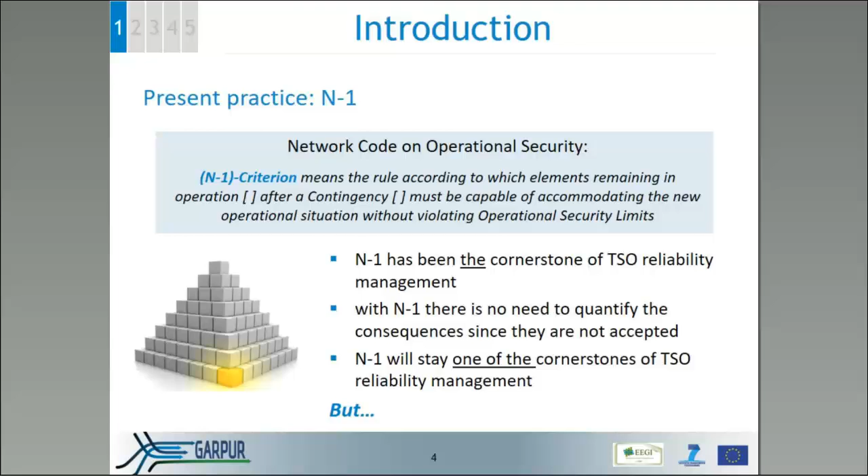A major shortcoming is that N-1 will treat all outages as equally probable. Also, it does not distinguish in any way between different consequences of outages. It is not sufficient to deal with uncertainties in large, complex systems. And what about the increasing probability of multiple outages?

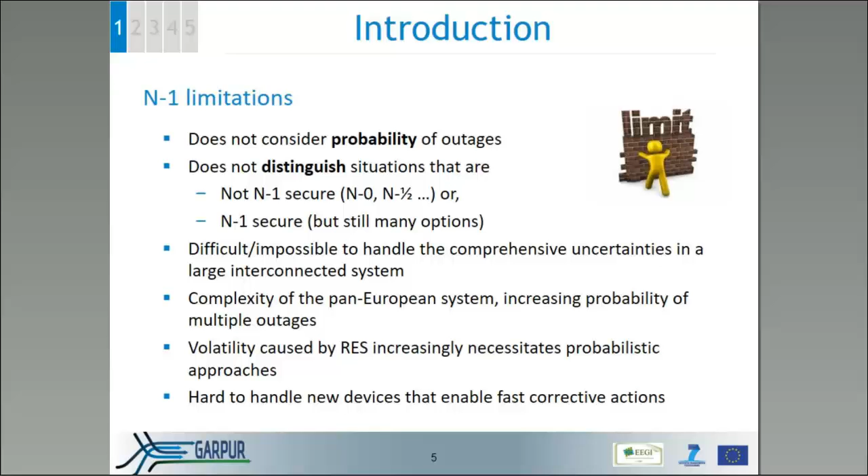Altogether, we see that there is a clear need for a probabilistic approach, which also will need to take corrective actions into account.

GARPUR responds to this by making a framework to balance reliability and costs. The question is, how can we reduce socioeconomic costs and still maintain reliability of supply?

For this, GARPUR has designed, developed, and assessed new probabilistic reliability criteria and evaluated their practical use with focus on social welfare effects. And for this, the different TSO time horizons are covered: power system operation, asset management, and also system development.

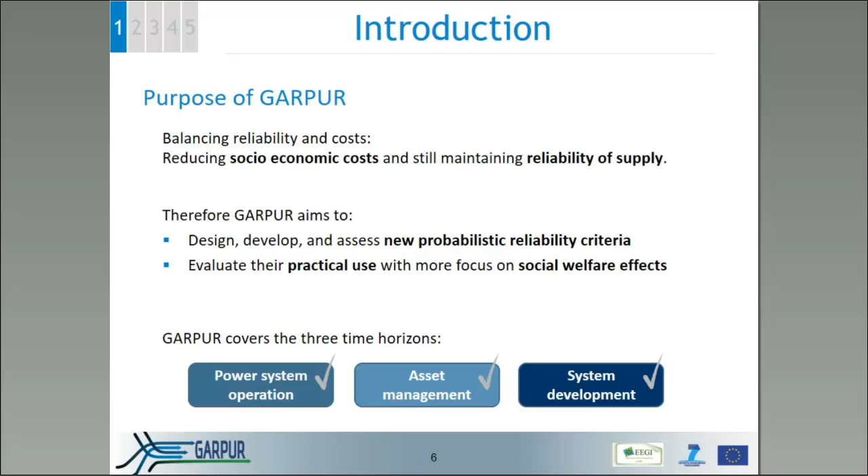Also, a quantification platform is developed for testing the new criteria towards N-1, and a roadmap for the deployment of the new criteria is being developed. And also, of course, dissemination towards stakeholders of the electricity market is important, just like here today.

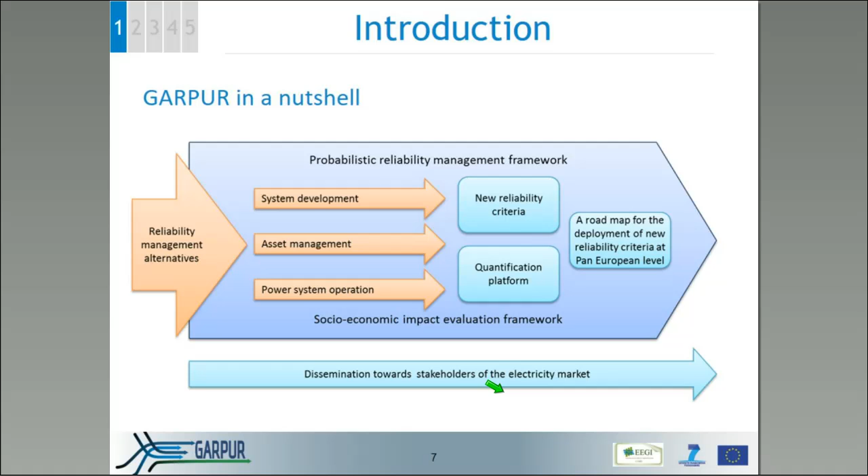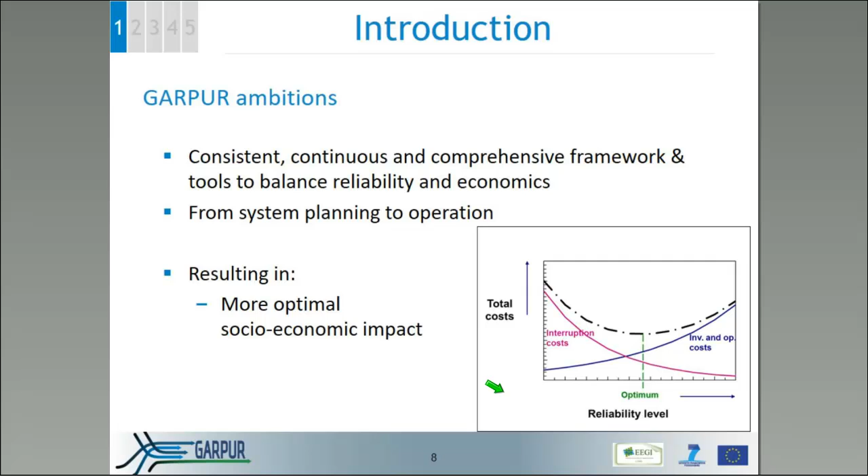So, to sum up, GARPUR is creating a consistent, continuous and comprehensive framework and tools to balance reliability and economics. All time horizons are covered, resulting in a more optimal socio-economic impact or balance between reliability and costs.

So if you need more information about the project, I suggest that you visit our website, garpurproject.eu, where you can also find information about our final conference, which will take place in October in Brussels.

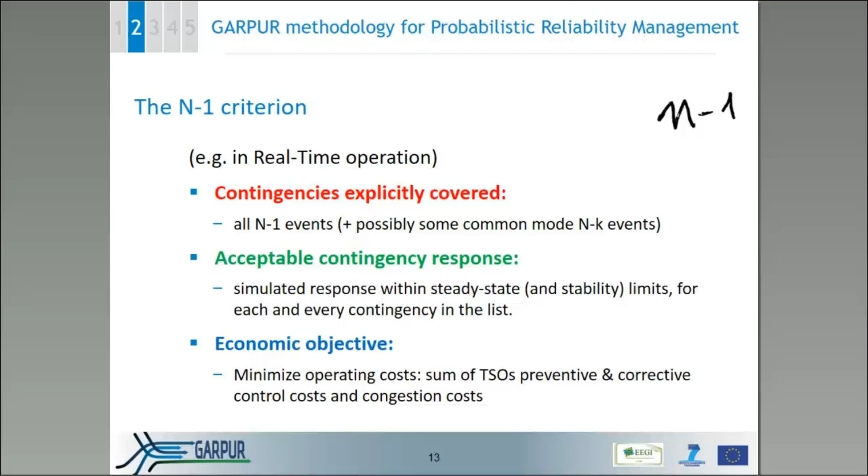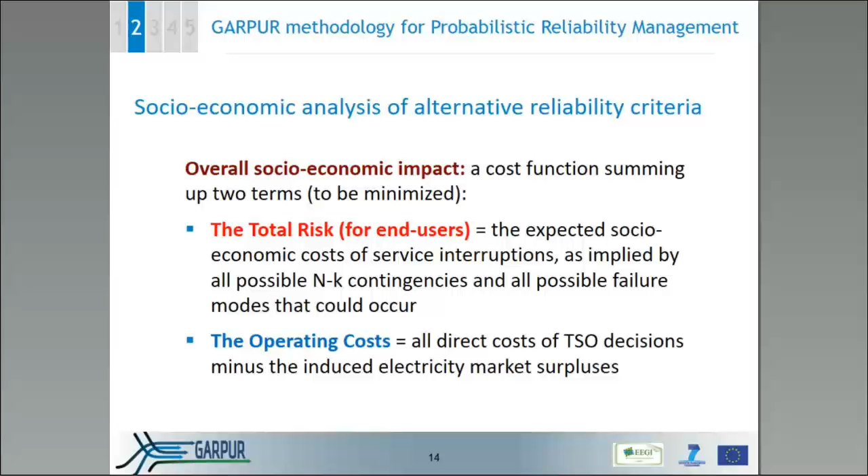Let's look at this criterion using an overall socioeconomic impact measure, which is a cost function summing up two terms: the total risk for end users, which is the expected socioeconomic cost of service interruptions implied by all possible contingencies and failure modes that can happen in practice - not only those covered by the N-1 criterion, but in principle all kinds of events - and on the other hand, the operating costs, which are all the direct costs of the TSO minus the induced market surpluses.

Suppose the TSO applies the N-1 criterion - this will lead to a certain operating cost, and there will be a residual risk because some contingencies which are not N-1 may still happen, have a certain probability, and could lead to load shedding or other consequences monetized in this risk, which is the expectation of these values. If you apply the N-0 criterion, operating costs will be much lower, but the residual risk will be higher.

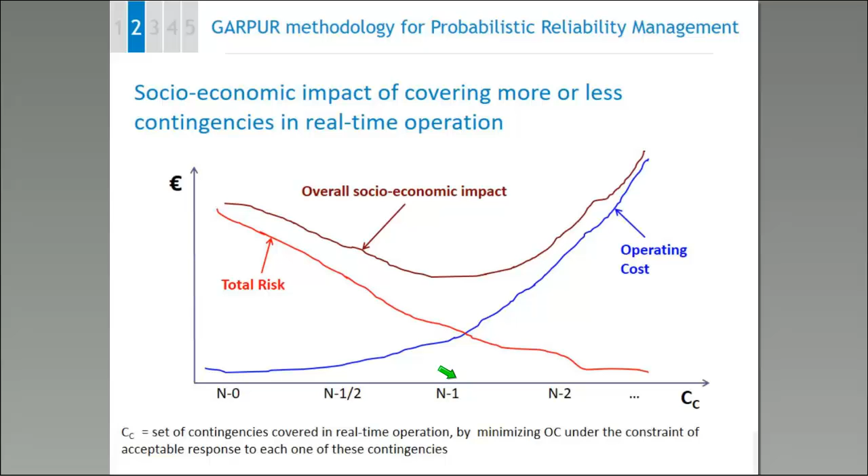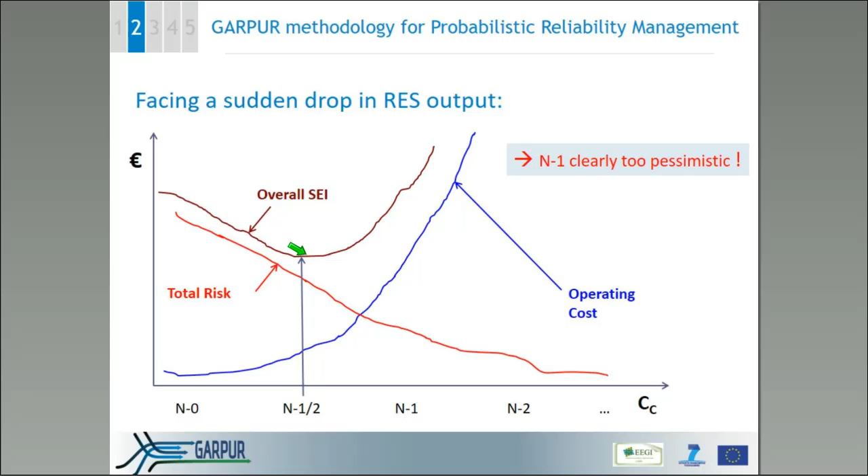If we are in another situation, for instance where there is a lot of available wind power and maybe suddenly there is a drop, then maintaining the N-1 criterion may lead to a very strong increase in operating costs. So the optimum would shift to the left of the curve, meaning it would be more wise to not cover all the N-1 contingencies.

Similarly, if weather conditions are harsh, the probabilities of some N-2 events will increase, so the total risk of service interruptions will increase, and in this case the optimum of the overall socioeconomic impact will shift to the right, meaning it would be wiser, closer to optimum, to cover more than just N-1 contingencies.

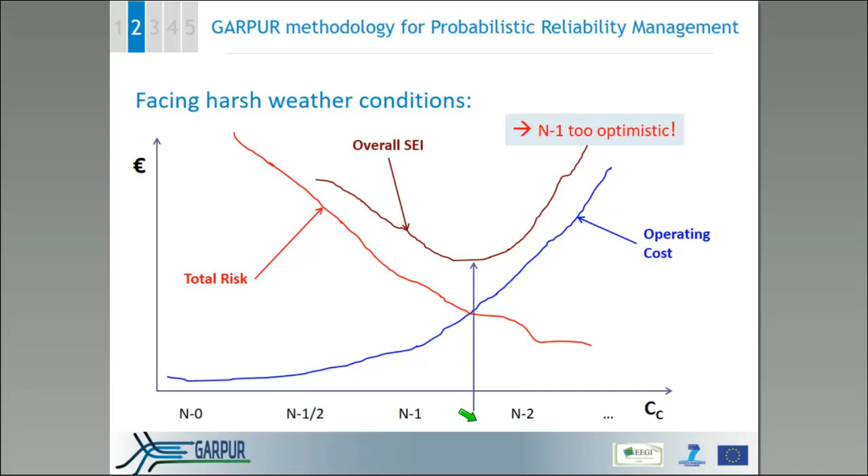So the general situation is that most often the N-1 criterion does not lead to an optimum situation from the overall socioeconomic impact perspective. Therefore we need an approach which allows us to adapt the set of contingencies to available information about all these curves.

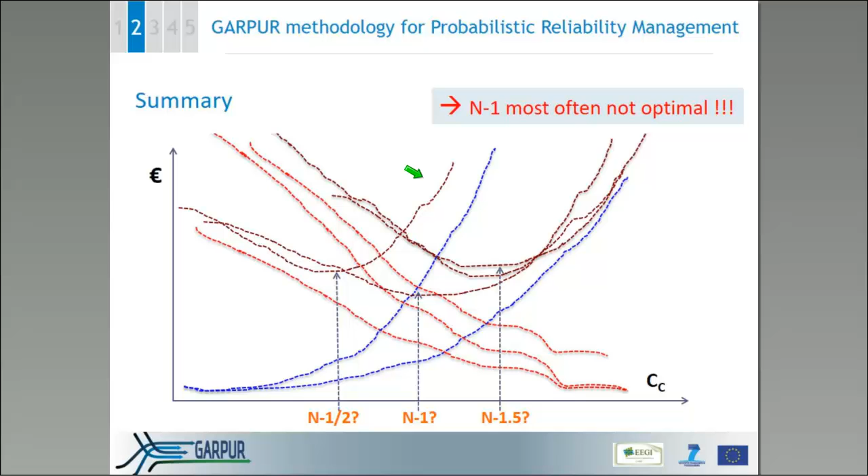This leads to the overall idea of the GARPUR proposal. In order to decide which subset of contingencies should be covered, we propose to dynamically adapt to information about socioeconomic costs of service interruptions, corrective control failure modes, and probabilities of contingencies and of these failure modes.

For instance, if we are in a situation with an important event like a G7 meeting, the cost of service interruptions might increase because we really don't want an interruption at that moment. Or if weather conditions become harsher, then the risk of having multiple contingencies or single contingencies - these probabilities will increase or decrease depending on weather conditions - and the same for the possibility of corrective control failures.

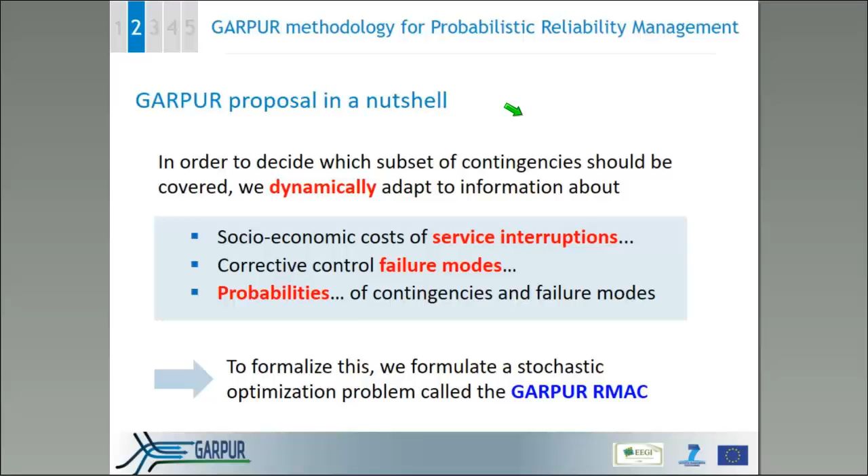So the general idea is to take into account all information available in a certain context to adjust, in a dynamic fashion, the list of contingencies to be covered. This leads to a formal mathematical statement of a stochastic optimization problem that we call the GARPUR RMAC. There are four ingredients in this RMAC.

First of all, the reliability target. This is a set of technical and possibly economic conditions that we want to impose on the possible system responses due to uncertain factors like contingencies, variations in load, and so on. So we formally define what we call an acceptable system trajectory, and then we set a threshold on the probability of unacceptable trajectories - we want this probability to be below a certain confidence threshold.

Second part is, of course, to formulate a socioeconomic objective function which incorporates both TSO costs, market surplus, and the costs of possible service interruptions.

And the third important ingredient is a principle which allows us to define in a dynamic fashion, among all the possible contingencies, or more generally among all the possible things that can happen and with respect to which the TSO wants to cover himself, those that could be discarded, so don't have to be covered explicitly, so as to reduce, for instance, the list of contingencies to a smaller list, which is really those that carry

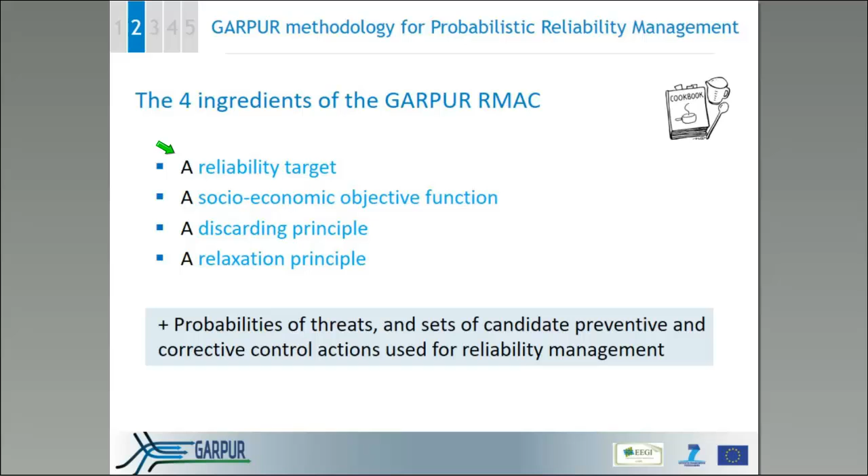Of course, these four components can be applied once we have models, which means a probabilistic model of the different threats like contingencies, variations in power injections, and so on. We have defined a set of candidate preventive and corrective control actions used for reliability management, and of course we need a physical model of our system like always.

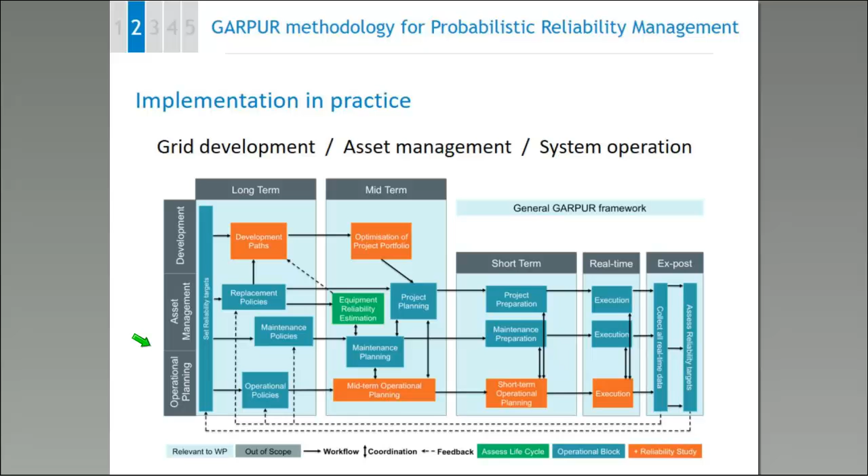And we insist on making the long-term context decision-making coherent with the shorter-term context decision-making processes. So in general, we can say that we impose that longer-term decisions are chosen so as to enable the reachability of shorter-term reliability targets, meaning that, for instance, in operation planning, the operator would then take decisions so as to make sure that over the next day, the reliability target and RMAC can be satisfied by the operator, given the uncertainty that is present the day ahead.

So this finishes my short introduction to the general idea of this probabilistic approach developed in GARPUR, and I give the word to Samuel, who will explain the application in real time.

Thank you. Thank you, Louis.

So I'll be, as Louis said, talking about how we can implement the ideas that Louis just discussed in a real-time setting, using the Icelandic transmission system as an example.

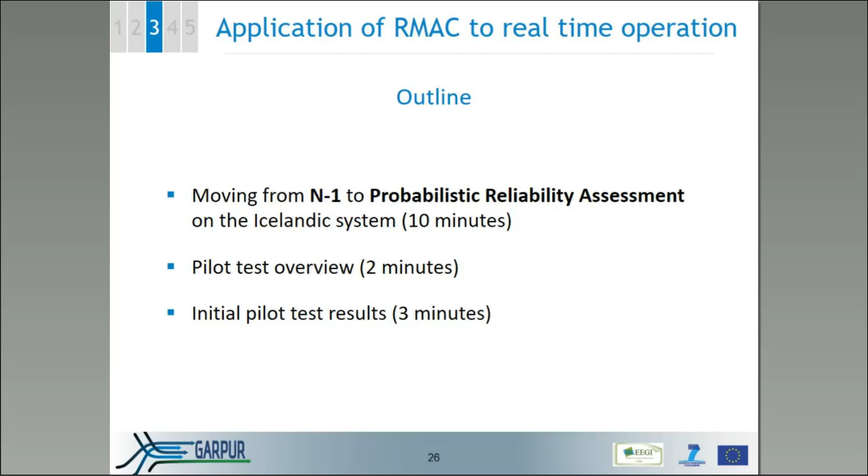So to move from the N-1 criterion, we need to move from physical to probabilistic indicators of system states and of risk. So a traditional N-1 assessment will calculate the lost load and any breaching of operational security limits following a contingency. But to achieve a probabilistic reliability assessment, we need to convert this lost load into a measure of

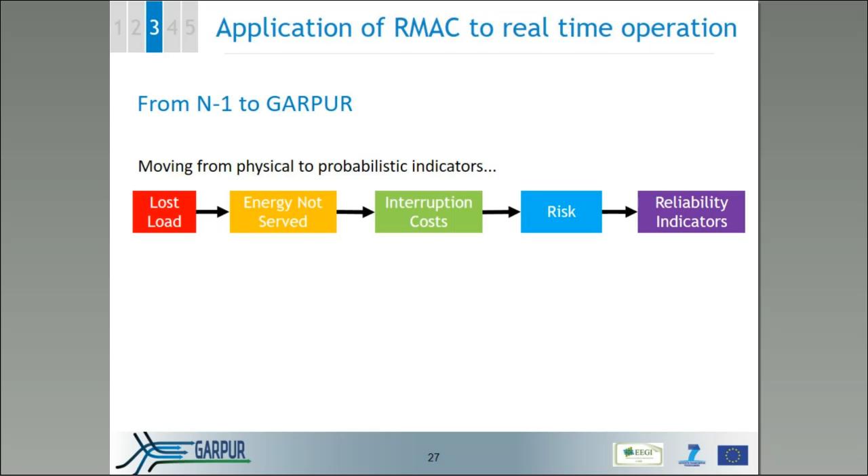energy not served, which is lost load over time. And then we need to convert this into interruption costs, which is an economic measure based on the value of any service outages to end users. And then we need some probabilistic estimates for the likelihood of contingencies to convert this into a risk measure. And then we have some of the indicators that were raised by Louis that are kind of a system-wide reliability indicator.

And in order to estimate these values, we need new models. So in order to estimate the lost load following a contingency, we probably need to upgrade our system response models in order to capture all the dynamics and system protections, and also any corrective control that the TSO might employ. And to calculate energy not served, we need some model that converts the initial disturbance into a loss of energy over time. We need socioeconomic models, probabilistic models, and ways to aggregate the individual results for contingencies into system-wide measures.

So the next few slides will walk through these steps to give you an idea of how we can achieve this in practice.

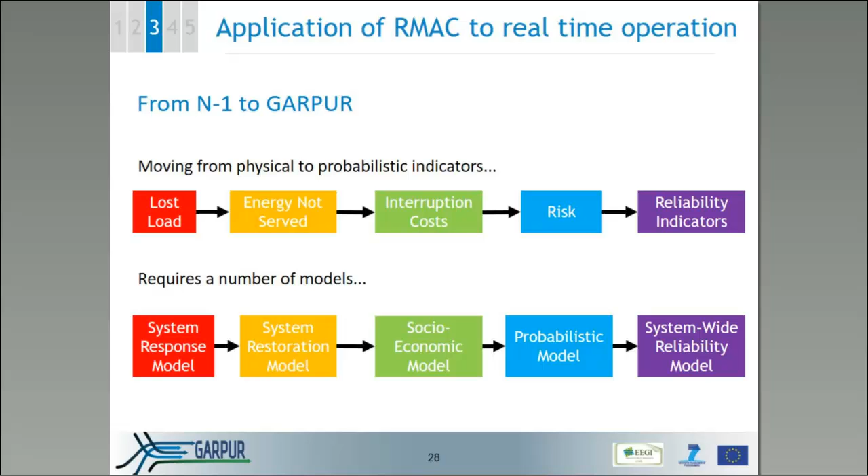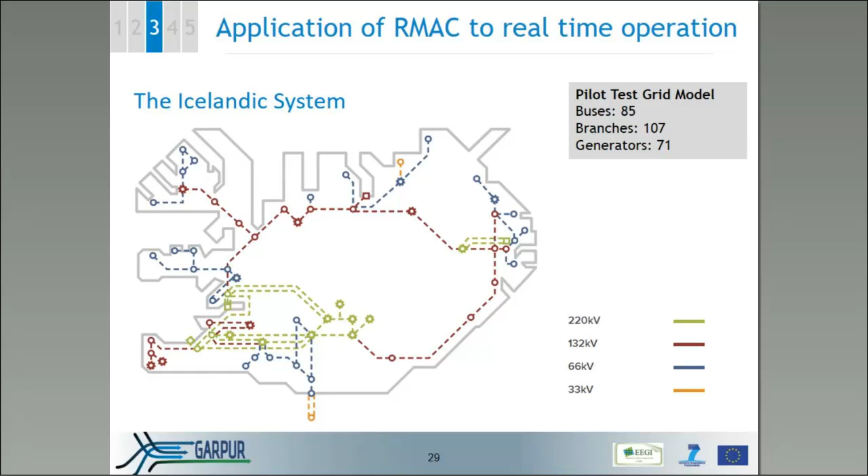In order to do this, I'll be using the Icelandic system as an example, looking at the N-1 set of contingencies, which consists of branch and generator failures. I'll be applying the heavy loaded but full topology case, so no components presently out, and at maximum load.

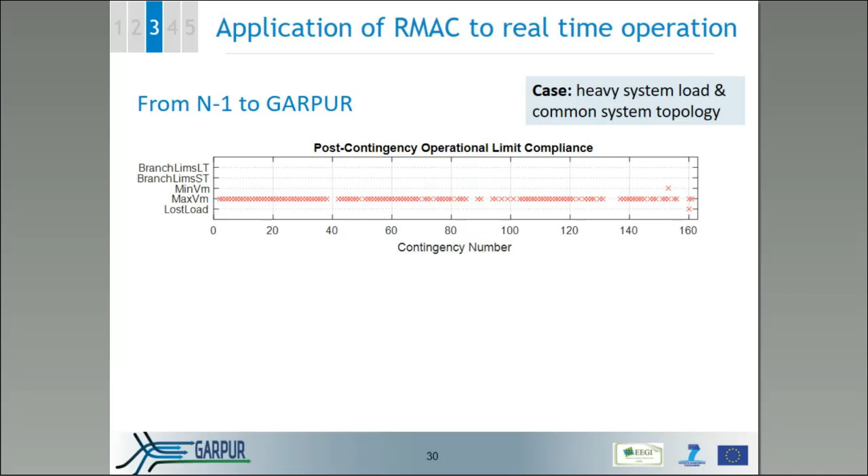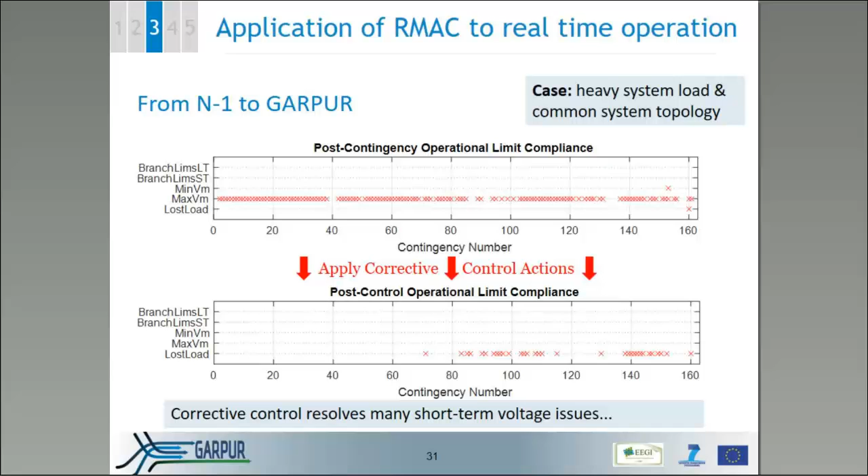In such a case, we have a number of voltage issues, which when applying corrective control, most N-1 contingencies result in a fine operating state and a few result in some potential load shedding. This is what we would expect from a typical N-1 contingency analysis.

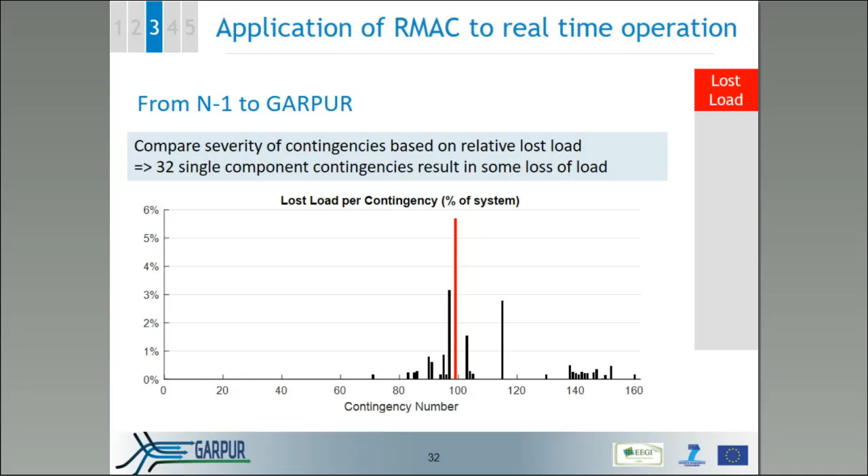If we rank these contingencies based on the expected loss load, we find that a particular contingency, number 99, seems more severe than the rest of the contingencies.

In order to convert this loss load estimate into an estimate of energy not served over time, we need a model that predicts the service outage duration based on the severity and location of any loss load.

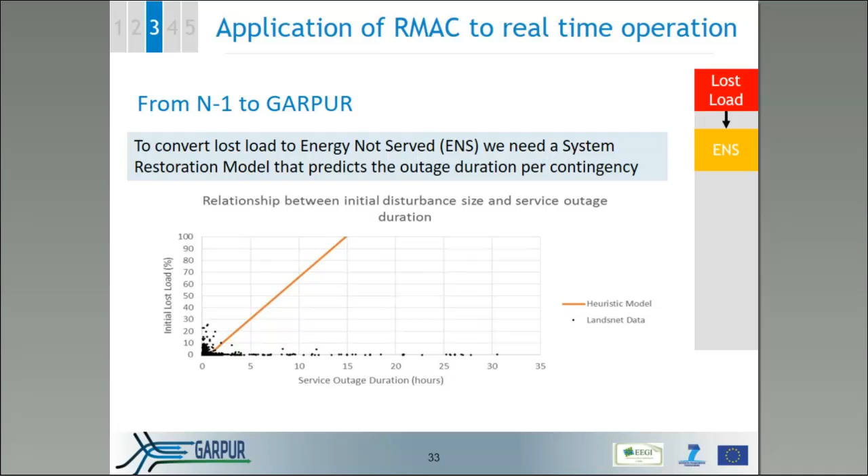Within GARPUR, we suggest a simple heuristic model because this is not something that TSOs normally model. But as you can see from the orange line, which is a simple linear heuristic model, compared with the black dots, which represent Landsnet data, these sorts of heuristic models aren't necessarily accurate.

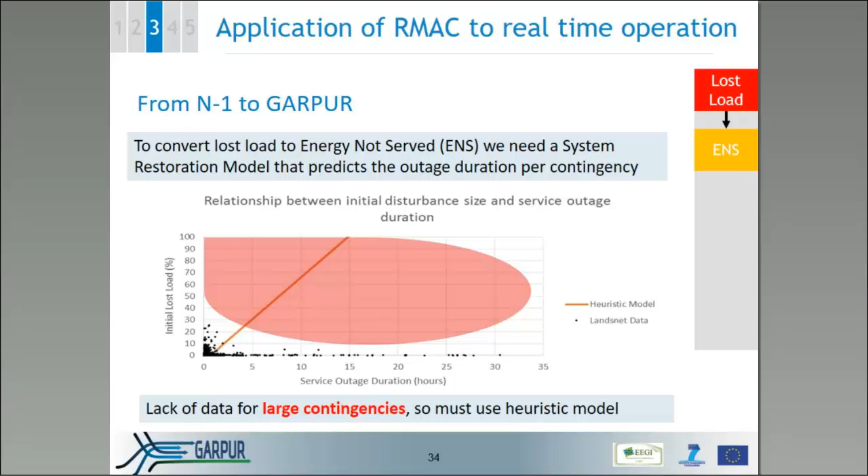But at the same time, we lack data related to very severe outages. So in some sense, a heuristic model is always necessary for the most severe of cases.

When we adjust the lost load estimates based on this heuristic model, we find that it just linearly scales the lost load into energy not served. And so the relative ranking of the contingencies is unchanged, and contingency number 99 still maintains the top spot.

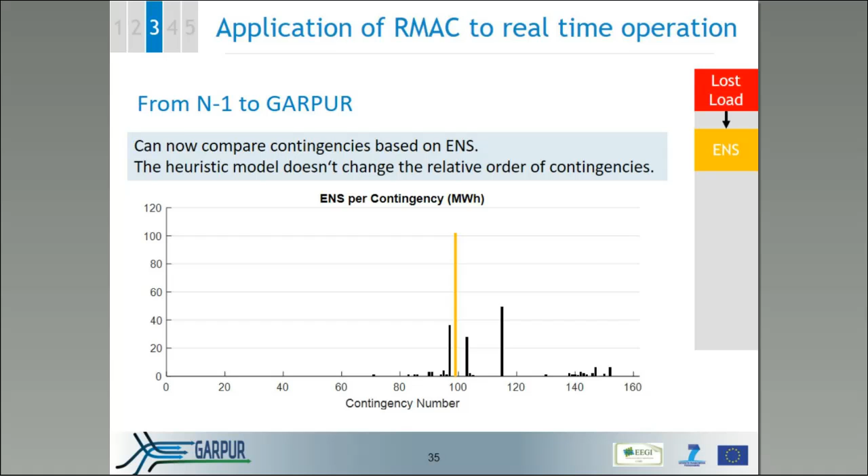In order to convert this into interruption costs, we need some understanding of which consumers were affected by any service outages. So we have information on the demographics at each node on the Icelandic system, a breakdown of which types of consumers are using the load on that node: commercial users, industrial users, or residential users.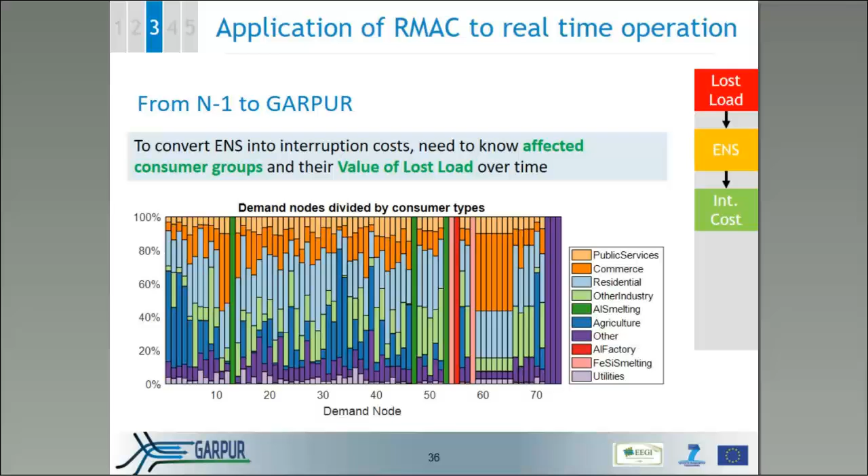And for each of these user types, we have a value of lost load curve. This tells us for some outage duration how much this outage will affect the different types of consumers.

If we look at the commercial consumers, for example, they're more affected in the first 15 minutes of an outage than they are in the 5th hour of an outage. So the economic impact is very time sensitive.

When we scale the consequences, so energy not served, by the value of lost load curves, we find that the relative importance of the contingencies changes. The previous worst case contingency when using a classical N-1 approach is now relatively insignificant, whilst one of the previously small, insignificant contingencies now seems to be the most severe.

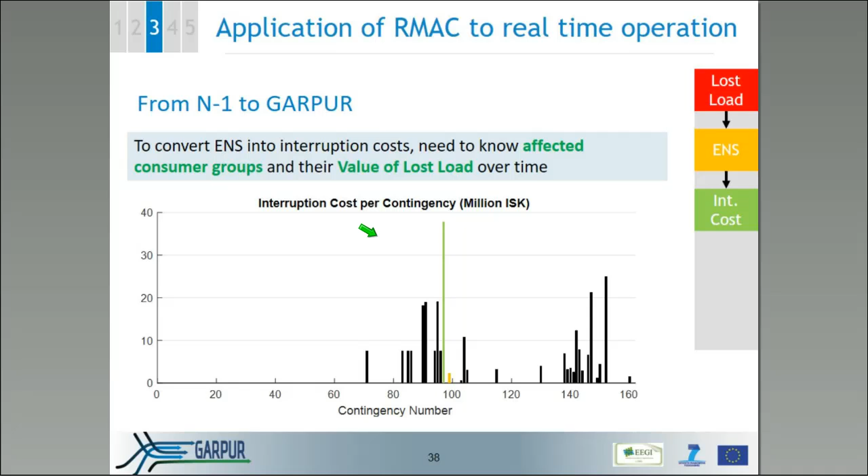So in order to convert this into risk, we need measures of contingency probability. And as discussed earlier by Oddbjørn, these probabilities are not static, but in this case, we'll just use the average probabilities for contingencies in Iceland.

We find that one particular contingency on average occurs 0.04% of the time. And there are a few other high likelihood contingencies, but in most cases they're quite low in likelihood, and the worst contingency in terms of interruption cost is quite unlikely, as you can barely see next to the 100 on the figure.

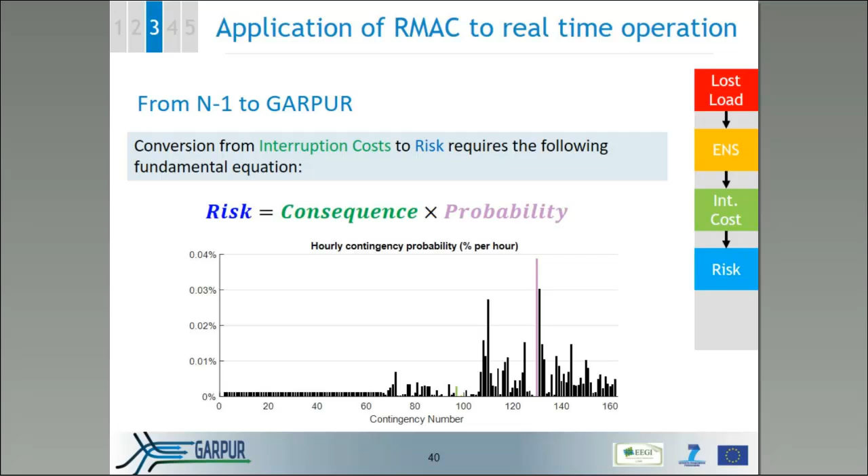If we then convert the interruption cost into risk by multiplying by probability, we find that a new contingency becomes our most severe event, and that contingency number 99 that we discussed earlier seemingly disappears off the map, while the worst contingency in terms of interruption costs still maintains some importance.

So the first insight that I can give is that by applying a probabilistic, socioeconomic-based reliability assessment, we find that we should defend ourselves against different sets of contingencies.

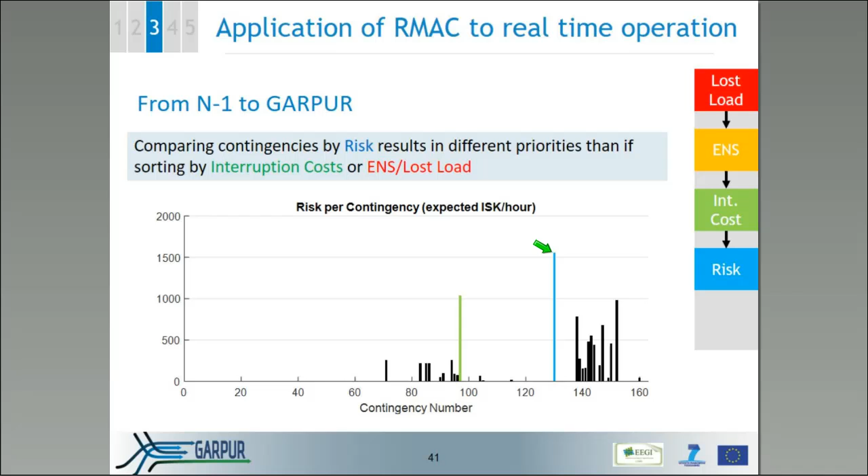So if we'd taken measures to defend against the worst contingency, number 99, in terms of N-1, we would find that we wouldn't actually affect the risk state of the Icelandic system so much, and that instead we should be taking care of this blue contingency over here.

Finally, we need to aggregate these risk measures into the aggregate measures discussed by Louis. So the assessed risk is simply a summation of the risks of the individual contingencies. In this case, it's around 9,000 krona, which is roughly equivalent to 70 euros.

The residual risk is the risk associated with all the events we didn't cover, so the N-2 contingencies and all the higher order events. In this case, we assume that they would result in a blackout. So if we assume the blackout costs essentially 5 billion Icelandic krona, and we calculate the discarded probability as 0.001%, we find that the N-1 assessment on average has a residual risk of 68,000 krona, which is equivalent to 500 euros. In order to affect this residual risk, we either need to add more contingencies to our contingency list or discard them, as mentioned by Louis earlier.

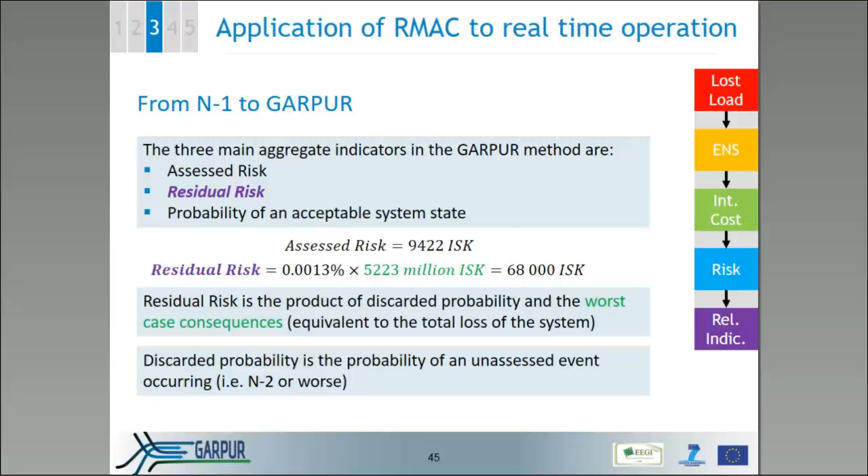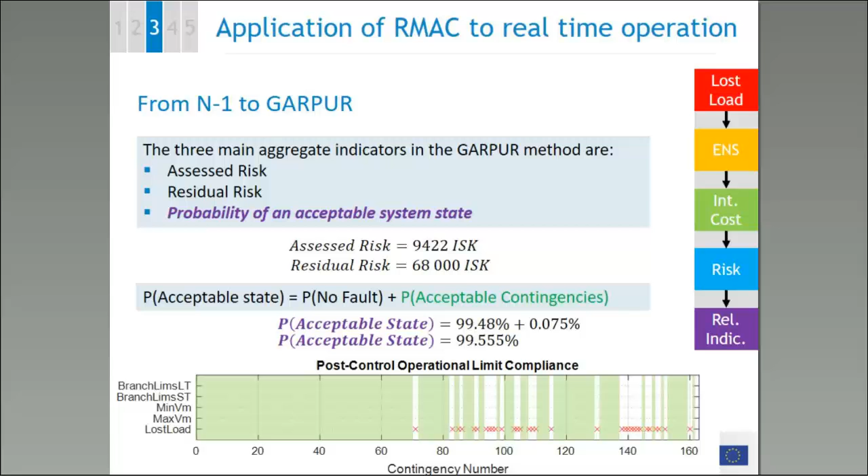The final measure, which is the probability of an acceptable system state, first requires that we define what an acceptable system state is. So in a classical N-1 approach, we aim to have a system that complies with our operational security limits, so it's most intuitive to consider those to be our acceptability constraints. To calculate the probability that we will end the hour in an acceptable state, we simply take the probability that no contingency occurs, and we add that to the probability that any contingency results in an acceptable system state. In this case, we calculate 99.5% of the time we expect to be in an acceptable state, which is equivalent to being in an unacceptable state 40 hours of the year on average.

So if we wish to move from N-1 to GARPUR, in addition to the additional tools and calculations that I've just gone through, we also need to include some variable failure rate models, so models that depend on weather and other threats, as well as the vulnerabilities of grid components. From this, we need to develop some variable contingency lists, which are based on a contingency discarding tool that I think Louis will cover later. We also need to use real-time system state data and real-time weather data if we wish to use these models in an operational context. And we also need to take into account any unexpected scenarios, so changes in intermittent generation or changes in load.

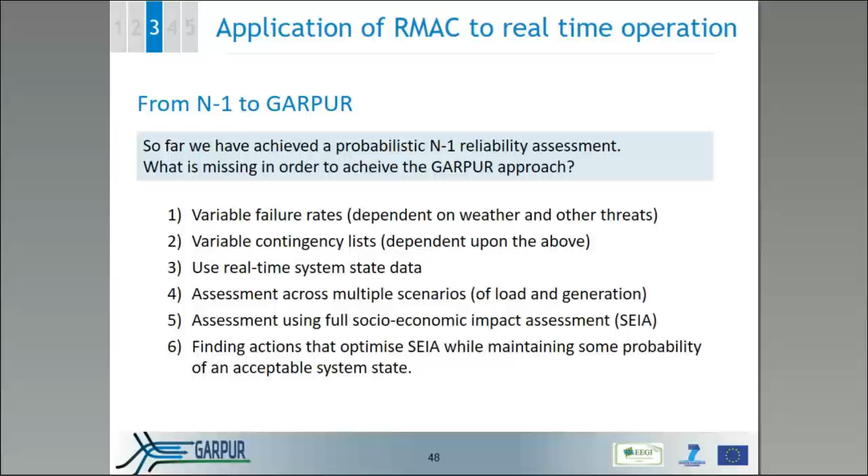The interruption costs that I showed are also just one aspect of a full socioeconomic impact assessment. So we haven't considered in this example things like operational costs or environmental costs, but they should, within the context of GARPUR, be assessed. And finally, the aim is to not just assess risk using probabilistic approaches, but to be able to control the risk by suggesting control actions that reduce the overall risk state of the system while still complying with the acceptability constraints.

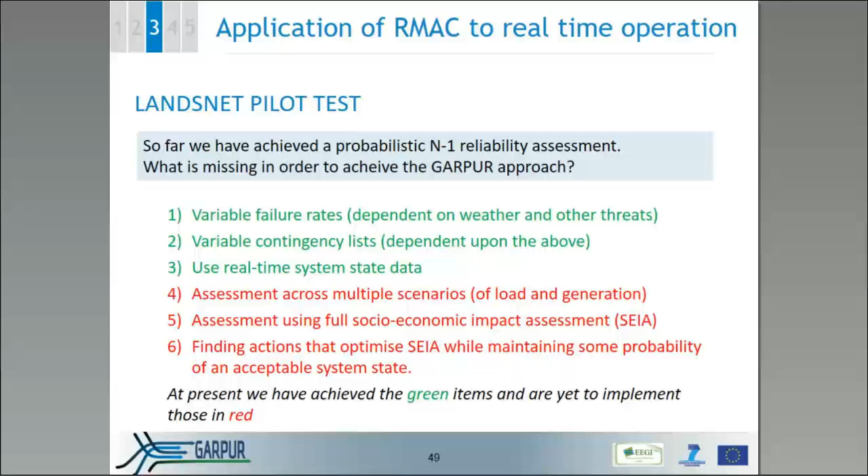And the general methodology of the pilot test is that we read in the latest snapshot of the system state every minute, and then we parse this into a useful format. We also read in live weather data to then calculate live failure rates, and these are just based on wind speeds at the moment. Then given the live failure rates and the live system state data, we apply the 5 modeling contexts described earlier in our probabilistic risk assessment. And then we update some temporal outputs and create some visualizations for the end user.

In doing this, we try to maintain the same residual risk as in the N-1 case. We also keep our contingency list to 5,000 or fewer contingencies in order to ensure that it calculates every 2 minutes at least.

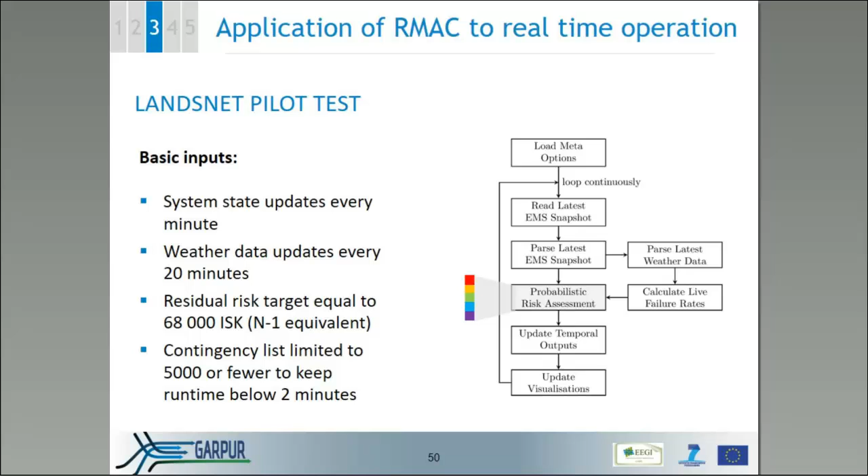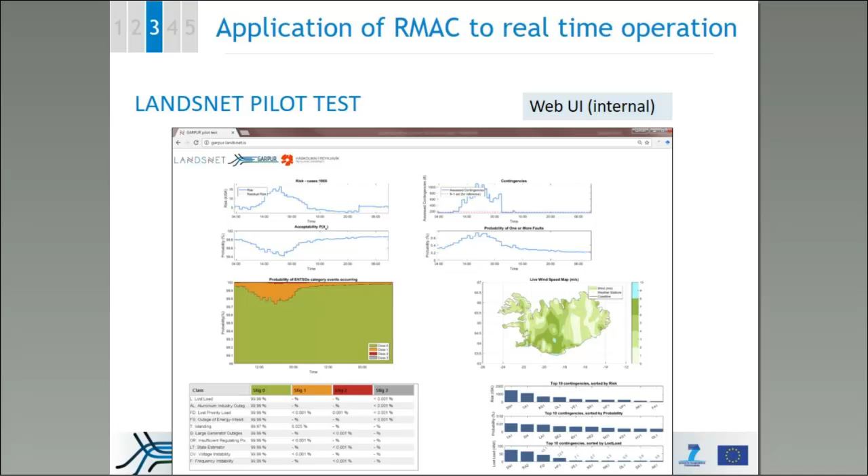So the main output of the pilot test is a web-based user interface that provides live reliability information to control room operators and anyone else who's interested in the company. And I'll go through some of these figures now.

So the main figure is the risk curve, which is primarily sensitive to weather and hence to contingency probabilities. You'll note that these figures at present on the screen, they relate to a storm. There's a storm passing over the country between 14 o'clock and around 8 o'clock the next day. As you can see, the probability that we comply with our operational security limits decreases during the storm.

You'll also note that there's a step in the risk function here, which is due to the economic models changing some assumptions due to the end of a weekend. So it's just reducing or increasing the impact on particular consumers depending on what the time of the week is.

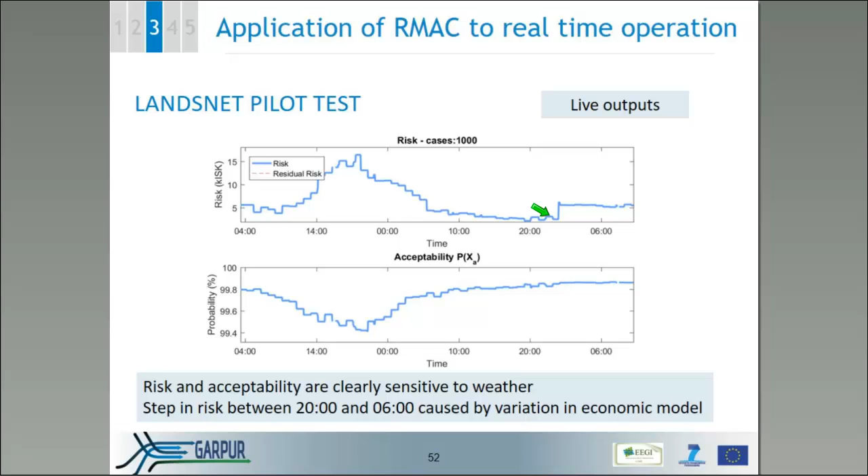The probability that any fault occurs increases during the course of this storm, and as a result, the size of our contingency list also increases over the course of the storm. So before and after the storm, we find our contingency list is smaller than the N-1 contingency set, but during the storm, it increases by a factor of 10 in size.

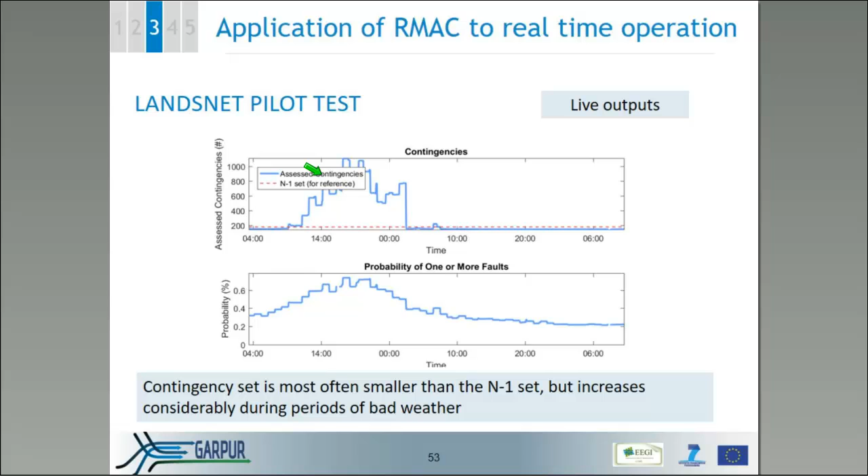We also display the acceptability of the system in terms of ENTSO-E event classifications. So we can determine that during the storm, most likely if there's any unacceptable state, it will just be a noteworthy disturbance, but that there is a slight chance of extensive incidents, with a negligible chance of any widespread or major incidences.

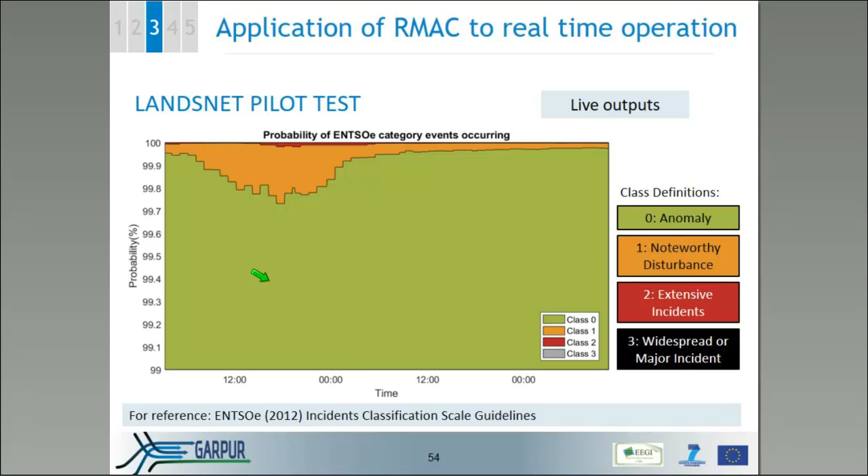And we also, for debugging purposes, we've also been displaying the live wind speed data on a map.

A typical output created by contingency analysis is a rank of contingencies from most severe to least severe, such as in this figure. We could rank contingencies from highest risk to lowest risk, from highest probability to lowest probability, and from most loss of load to least loss of load, where risk is simply a multiplication between these two figures. But as you'll notice, such a figure is quite difficult to interpret, because the appearance of a contingency here or here doesn't necessarily imply any particular position in terms of risk.

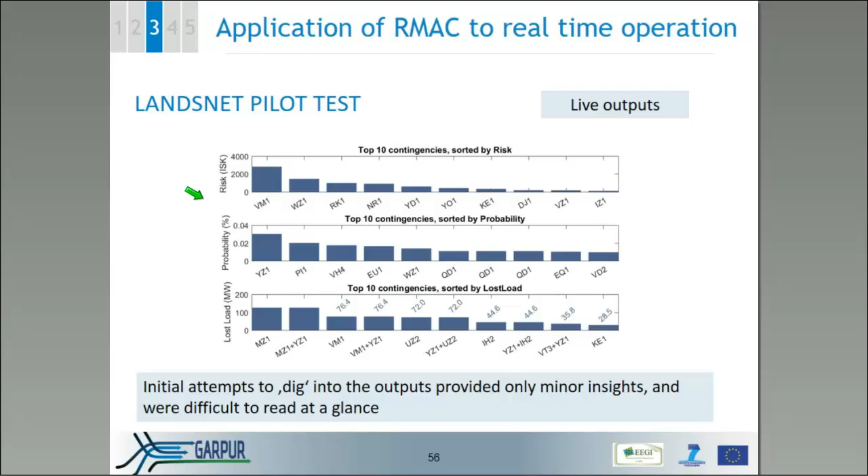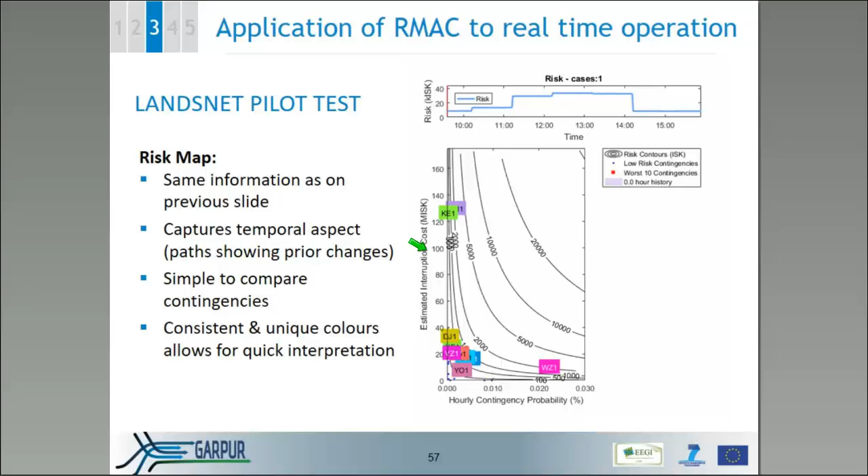So if we imagine these boxes moving to the right, leaving a colored trail behind them, we can then display all of the aspects in the previous figure, as well as the temporal aspects of how the state of the system is changing and how the risk on the system is changing.

To close this section of the talk, we've shown how, in a basic way, we could move from an N-1 reliability assessment towards a probabilistic reliability assessment. We've also shown that such an approach is feasible on the Icelandic system, which, although it's small, is a good first step, a simple example of how such an approach would work, and it allows us to assess the best ways to scale such an approach up to larger transmission systems.

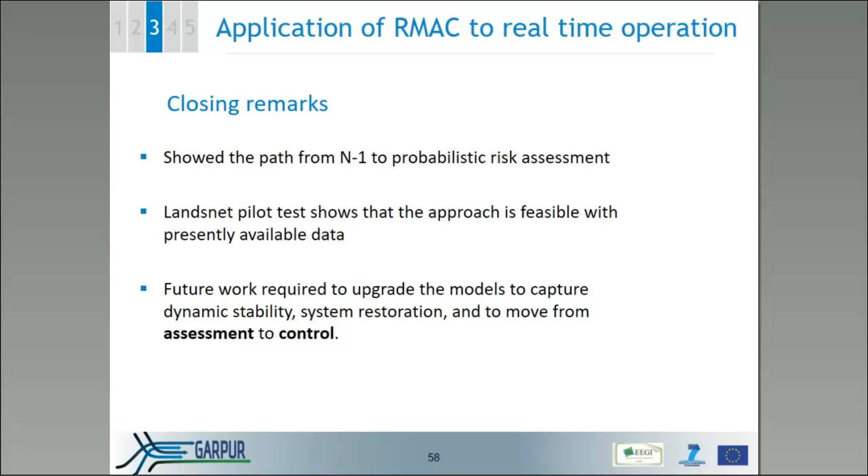Finally, most of the future work is related to capturing the dynamic stability issues on the transmission system, improving our system restoration models, and trying to move from a risk assessment to some sort of risk control approach. So now I'll hand the presentation back over to Louis.

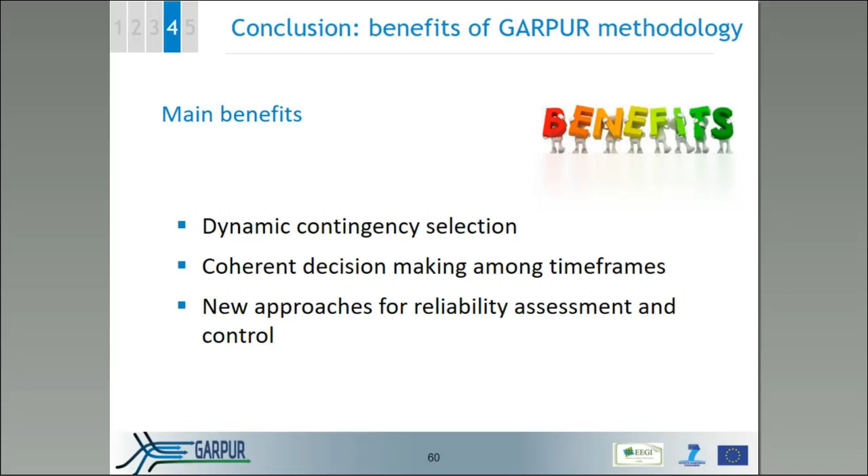Thank you. So I will summarize the main benefits of the GARPUR approach, which are listed here in this first slide. First of all, concerning contingency selection, as you have seen in this example shown on the Icelandic system,

we have developed a principle, which we call the discarding principle, for choosing the subset of N-1, N-2, N-3, etc. contingencies that should be covered either by preventive or corrective control actions, or a combination of both. This allows us to select and adjust the set of contingencies that has to be covered in operation according to, for instance, weather conditions, but also other conditions which have an impact either on the probability of contingencies or on the cost of service interruptions. This principle should allow operators to adjust their perception of risk and determine a strategy to manage reliability in a more dynamic fashion.

And this is justified from a socioeconomic point of view, since basically what the discarding principle says is that we should take into account all those contingencies that might have a significant impact on the overall socioeconomic impact, including TSO costs, congestion costs, but also service interruption costs.

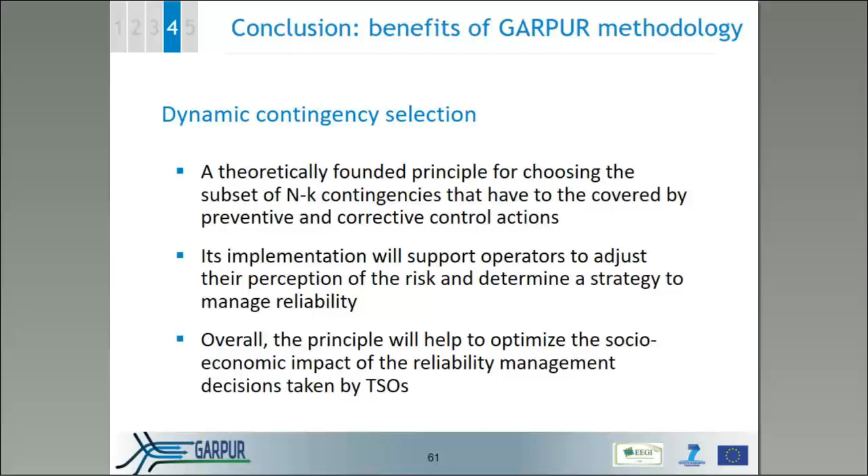Then the second step—we have talked mostly about real-time operation—is that we also have developed in GARPUR a systematic approach to define reliability management approaches and criteria for longer-term decision-making, coming back to the day-ahead problem. When you want to decide what to do one day ahead in time, what you have in front of you is uncertainty about the consumption and generation pattern of the next day, and also about the weather conditions.

Nevertheless, what you can do is see how the system would be operated in real time along a set of possible trajectories for the next day, sampled according to your uncertainty about these factors. For each trajectory, you should look at what would be the response of real-time operation in terms of reliability management, and see whether it would lead to a problematic situation where the residual risk would be too high, or the probability of unacceptable system response too high. This allows you to assess, day ahead, different candidate decisions in terms of the implied risk on operation.

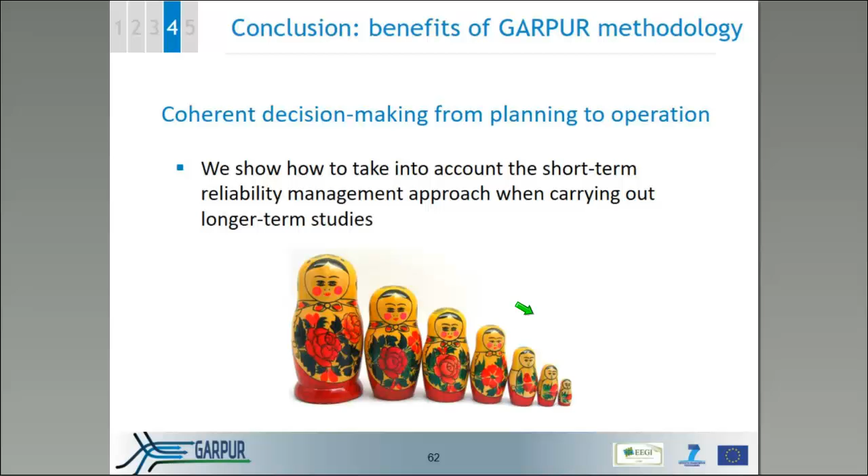So if you consider that one of these Russian dolls represents the real-time operator, and you are day ahead, you have to incorporate somehow a model of the real-time operator in the decision-making process. If you are in the midterm—say a few months ahead—you have to incorporate the sequence of finer-grained models from day-2 or week-ahead to day-ahead to real-time to emergency mode. In order to make these kinds of problems tractable, we have to simplify the way we model shorter-term processes, and we have introduced a notion of proxy to formalize this in the GARPUR project.

We have also worked in the project, in a coherent fashion, on two complementary aspects of reliability management: reliability assessment, where you want to see whether in a given situation the system would be sufficiently reliable over a certain horizon, and reliability control, where you want to find an optimal decision in terms of socioeconomic impact, making the system sufficiently reliable over that horizon of time.

These two parts can be used in combination to help operators manage reliability in a more efficient manner than they can do today, by taking into account the probabilities and cost of service interruptions in their criteria.

We have also worked in the GARPUR project on a simulation framework which allows us to study offline the impact of moving from N-1 based reliability management to the probabilistic approach, by simulating over a set of scenarios how the system would perform using the N-1 criterion on one hand, and on the other hand using for the same exogenous conditions the probabilistic approach. This should allow us to compare the type of decisions taken with the two families of criteria, and to see the impact on the actual socioeconomic performance of the system when using either the N-1 or the RMAC.

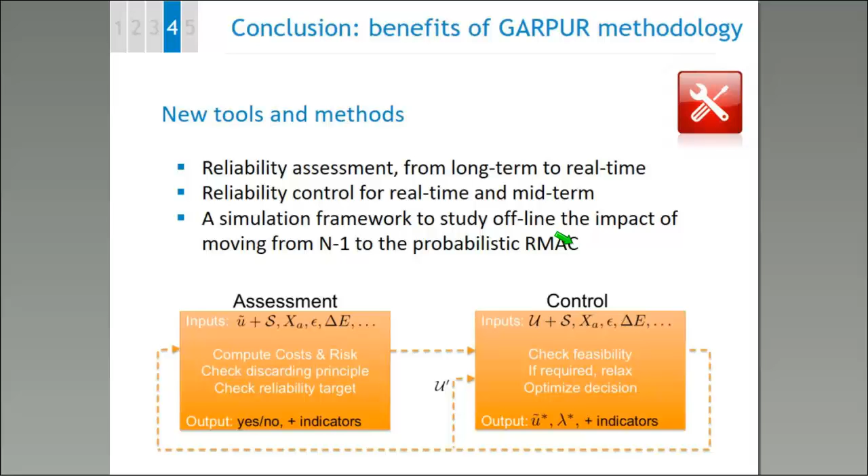The idea is to use this simulation framework to better understand how the new method works with respect to N-1, and so help TSOs to progressively adopt this approach in real operation. For the next webinar, we will talk about this aspect, which is what we call the GARPUR quantification platform, which allows us to do such simulations, and we will present how far we have been able to go with the development of that platform and its testing.

Finally, there are other pilot tests being carried out for the time being, and they will be presented as well during the next webinar, where we'll also discuss what it means to use the probabilistic approach for long-term grid development studies.